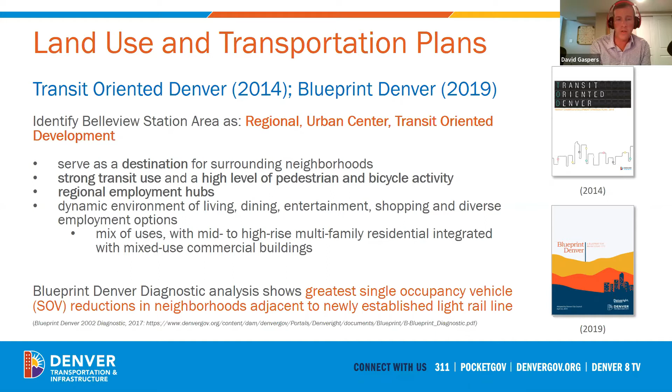Most of these regional centers that we have planned for the city are, again, along our light rail system. Before I go to the next slide, I wanted to point out the bottom part of that slide talks about something called the Blueprint Denver Diagnostic.

When we were updating Blueprint Denver, the original from 2002, we took a hard look at that old document and saw what worked and what didn't, and what we actually accomplished. One thing we noticed was the expansion of the Southeast light rail line from RTD, called T-Rex, which opened in 2006. About 8 or 10 years later, we could compare commuting patterns before and after. Some of our neighborhoods saw the most dramatic reduction in single occupancy vehicle commuters, folks driving to work by themselves, along that Southeast rail line.

Imagine neighborhoods like Platt Park, Wash Park, University Hills. Some of those saw as much as 25% reduction, and we hope to continue to see that as more TODs occur along the RTD system.

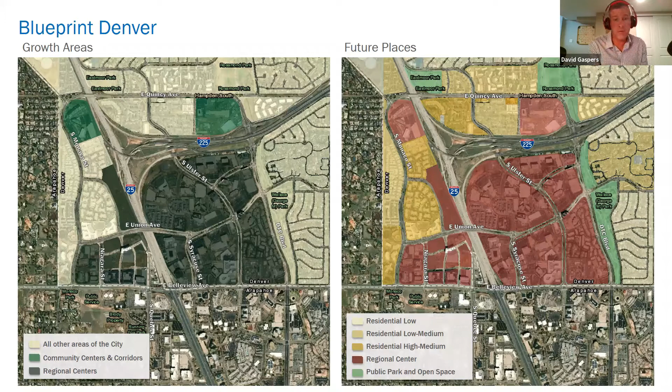You can see here in this area, and I see one of the questions is whether Belleview Station is within the city of Denver. You can see the faint dotted line, and in the previous maps you could see that area highlighted. That is within the city of Denver, which is a good question because I don't think everyone understands that we have this funny little rectangle at the bottom of Denver that goes all the way down to Belleview.

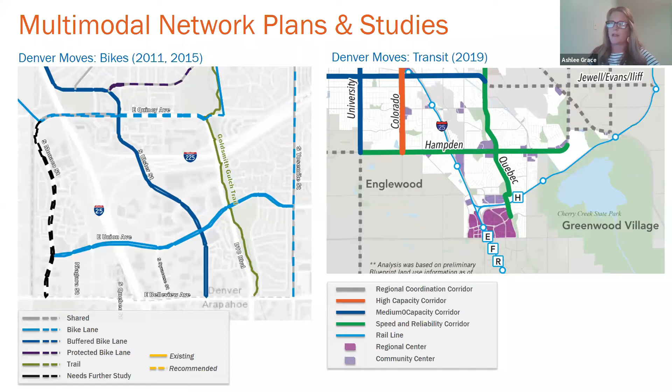So in addition to these citywide plans, just last year in 2019, we completed a Belleview Corridor multimodal transportation plan. That involved stakeholders from the city and county of Denver, as well as Greenwood Village, CDOT and RTD. It took a close look at the whole general North DTC area that falls within the city and county of Denver.

It also recognizes that Belleview, as many would anticipate, is not a great multimodal option for pedestrians, bicyclists, and folks on wheelchairs trying to traverse east and west in that area. It recognizes that interchanges can be difficult for multimodal facilities to cross, primarily the ones that exist today in this area, being the Belleview interchange, and one not on this map, the Goldsmith interchange.

And as everyone has probably seen, it recognizes Union currently serves as the most comfortable multimodal east-west connection in the area.

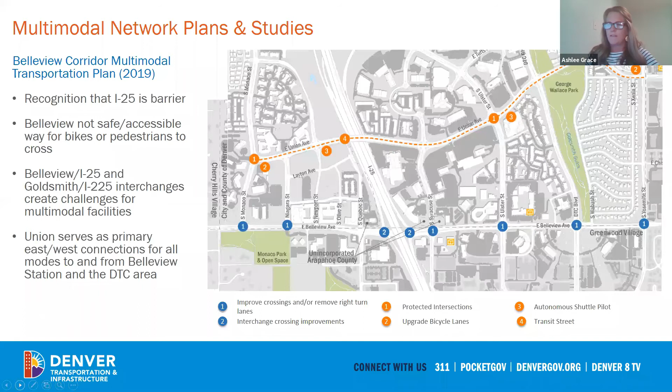Finally, some of the other plans or studies that Denver is excited about that touch this area are not actually being led by Denver, but Denver has been involved in and is very supportive of - plans that think about our future and what that holds, especially regarding innovation and technology.

We got a really good opportunity to experience just how quickly technology can come at us in the past couple of years when scooters hit the streets of Denver. Denver recognizes, as do a lot of our partners in the area, that there are a lot of things coming our way in the next several years and decades that we can't necessarily tell you about today, but it's important to think through how our infrastructure can be supportive of those innovations as they come about.

One study that just wrapped up was conducted by the Denver South Transportation Management Association, who are a partner on the Belleview I-25 project. They looked at the 7 light rail stations within their purview, from Belleview South to Sky Ridge, and assessed, based mostly on existing conditions, the mobility needs and infrastructure readiness to evaluate which stations are good candidates for future innovation and opportunities.

What stood out to Denver in looking at that report is that Belleview Station really stands out as one of the leaders in all of the categories listed, in terms of innovation - a good home for new innovative ideas, whether it's automated shuttles, mobility as a service, or microtransit. Because of the existing infrastructure, the needs and the readiness, Belleview definitely rises to the top in that study.

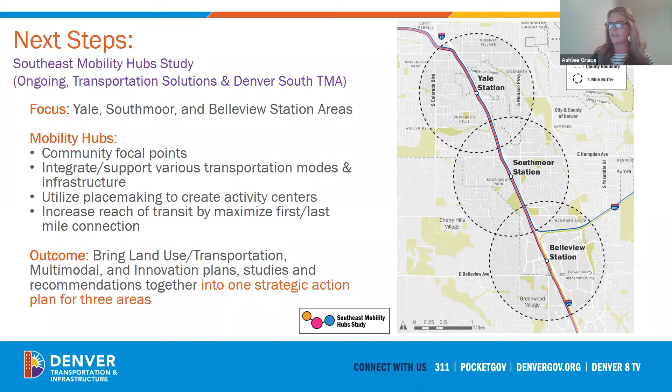We have another poll question for you. In the beginning, we asked how you use transportation, or what modes of transportation have you used in the last year. Now we're looking at the future: what do you want to use more of? What would you like to use more of in the future? So we've got some answers and responses coming in here. Thinking in the future, how do you want to get around this area in particular? Give you a second here. Maybe another 10 seconds to get a few more responses in.

All right, so it looks like light rail and walking—people in the future would like to do more of that. That's great to see. Now, I didn't figure this out last time, but you can actually close down this poll box on your own, so make sure to click that little X so you can see the rest of the presentation here.

So we do have some time for questions, and we want to make sure the questions we're addressing right now are really related to the information, the plans, the studies we just covered. If there's some clarifying questions here, we'll jump to those. I know people have a lot of questions about the project that we'll get to in the second half, but let's start with this one here.

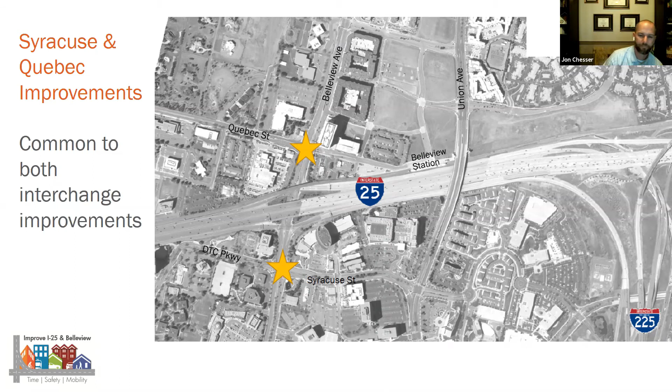We will end up selecting one of these two approximate locations to put that new bridge, that new grade-separated crossing of I-25. You're going to see this on other slides as we go forward. I want to make sure everybody knows only one of these two locations will be selected, and that will happen in the next phase of design. We simply don't have enough information right now to make that decision, and want to collect more as we move forward to select the right location. You'll see this in the SPUI and in the split diamond alternative we're going to talk about next.

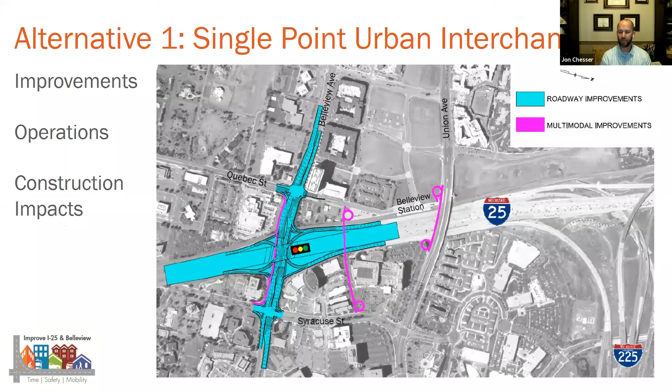So that's a little bit about the SPUI. Again, there's more detail provided in the October 7th public meeting—take a look at that video if you want more detail. But that's how the SPUI works: it consolidates intersections, removes one of the signals, and we're able to move people through this interchange a bit faster.

So there are new roadway improvements and multimodal improvements as mitigation on Union, and we'll talk about those in a little bit more detail.

The reason that the split diamond advanced to this stage is that it disperses traffic throughout the interchange complex better than what is done today. By providing new access on Union from I-25 and from 225, and keeping the access at Belleview, you're able to disperse traffic. Folks are able to get to where they want to go, their destinations, more efficiently.

So those folks wanting to use the northern part of this interchange complex, places off of Union, the development that's there, the light rail station, those folks don't need to use Belleview in this scenario. They'd be able to get off and use Union to get to where they want to go.

What we see is a reduction in traffic volumes on Belleview in 2040 by about 12 to 15%, and an increase in traffic volumes on Union in 2040 of about 30 to 34%. Now, this isn't over what we see today. Traffic on Union, traffic on Belleview is going to increase if we do nothing. So this is over the no build.

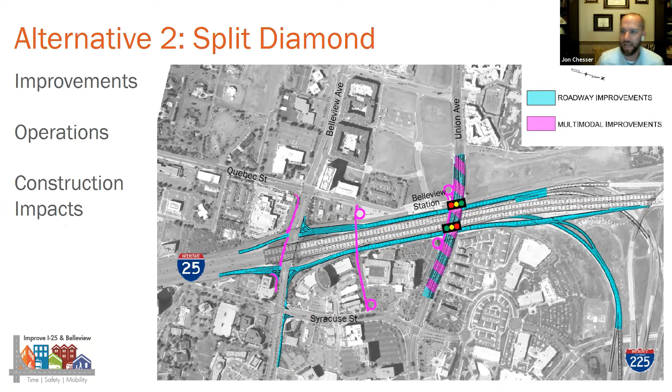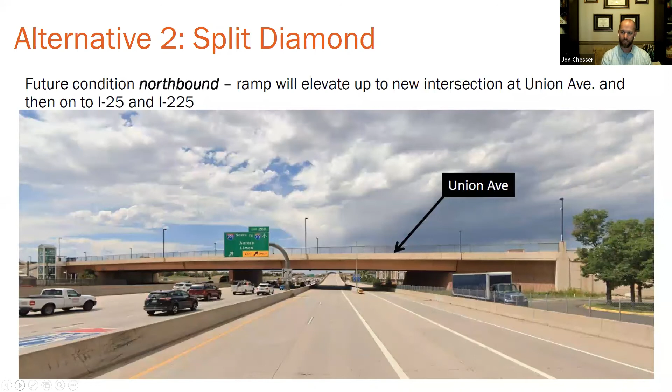So a couple of visuals, if we go to the next slide, that illustrate northbound and southbound how this would work. This is today, northbound from Belleview getting onto I-25 and 225. You've made your turn from Belleview, headed north on this ramp, I-25 is off to the left. Today the ramp proceeds underneath Union, then you can make your way to I-25 and 225. In the proposed split diamond scenario, this ramp would no longer go underneath Union - it would go up to meet Union at a new intersection, and folks could go east or west from there.

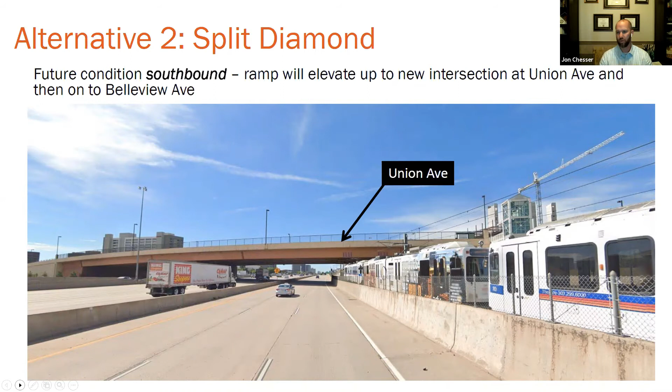Same thing southbound if we switch to the next slide. This ramp continues underneath Union today. In the future, in the proposed split diamond condition, this ramp would go up to and meet Union at Union's elevated level - a new intersection there, and folks could go east and west on Union. So the entrance and exit points for I-25 and 225 stay the same. Once you're on those ramps, the ramp would proceed up to Union instead of going underneath as it does today. So it gives you a little bit of a visual of what we're looking at there.

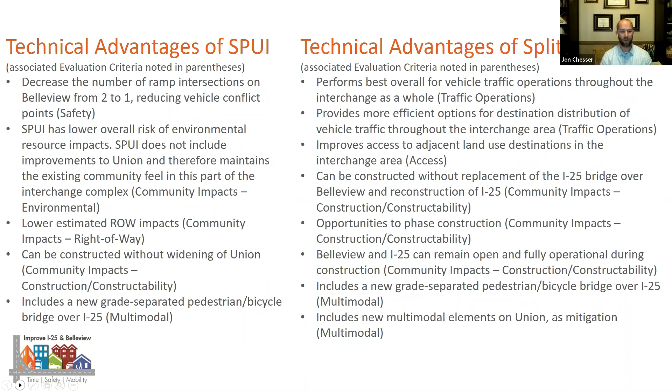So really interested to hear more about the values and priorities in this community. We've heard a lot through the public involvement process, and we encourage you to stick with it and keep commenting as we go along.

We'll take the technical analysis and the public input and pull those together. Our executive committee, made up of elected officials and executives from all the agencies I mentioned earlier, will hopefully get to a decision on which alternative to advance to the next stage of the project. That next stage is preliminary design, but we're currently in conceptual design.

Preliminary design will allow us to keep refining, keep addressing some of the concerns and thoughts that come up in the design process, and continue making that better as we go through.

What's important to note here, looking beyond this year and beyond that decision, is that there is no construction funding for this project right now. I'll repeat that: there is no construction funding for this project right now. So this is not a project that's going to be under construction next year or the year after that. There's a process that needs to take place here.

What we are doing as a project team is working with all the stakeholders to identify funding opportunities. For example, this project is currently on CDOT's 5 to 10 year plan for transportation projects in the state. That is not a funded plan, but it's better to be on the plan than not. As we're competing against other priorities and projects in the area for limited resources, being on that plan is huge—it means you're part of the conversation going forward.